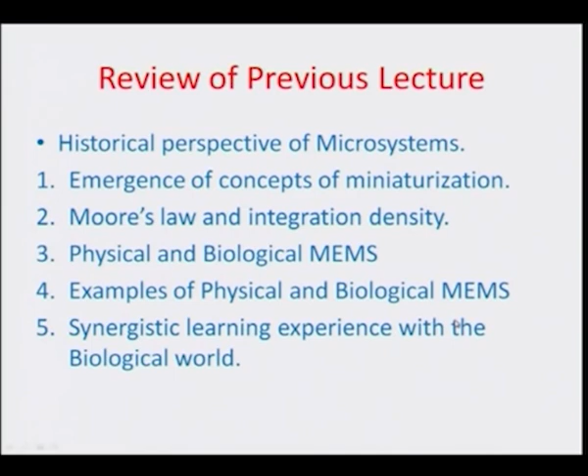We also talked at length about physical and biological MEMS, and discussed some very interesting examples of physical and biological MEMS systems. So, the take home message for this particular lecture was really that it is a synergistic learning experience with the biological world. There is a lot of inspirational material available from the biological world that can be translated to make microstructured systems, nanosystems. And so, a vast majority of fabrication processes are really bio inspired as well.

We will look into this in detail through a historical perspective of how machining or microstructuring evolved over time. So, let us get a historical perspective of some of these processes which are known as manufacturing processes.

So, we have already in our engineering lectures prior to this seen that a lot of parts can be manufactured by some of these basic processes like casting, forming, and various shaping processes. Therefore, all these processes making parts really require further finishing before they are ready to be used in an assembled form.

And these sort of high throughput processes are further required to be fine processed, so that whatever requirements of tolerances are dictated by engineering assemblies of such parts can be realized.

And so, this is really one of the reasons why initially advanced manufacturing processes were developed, so that tolerances up to the size of microns, or even nowadays increasingly to nanometers, can be easily provided by the advancement of the process itself.

Sometimes also in many engineering applications, interchangeability of a part is a major issue, which needs specific dimensional accuracy and surface finish. So, this again dictated the need for these advanced manufacturing processes.

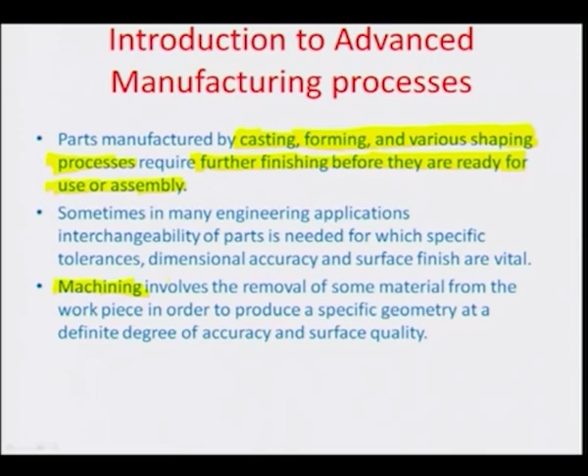So, let us look at one of these processes, machining, which involves the removal of some material from a workpiece in order to produce a specific geometry, and that too at a certain degree of accuracy and surface quality.

So, with machining into picture, one can really look into the history of machining, or where this concept of shaping objects started. One of the first examples in mankind of sort of machining comes from this most ancient Paleolithic stone tool industry, the Oldowan.

Further developments happened, and the invention of nets or bolas, where this big rock carved in a spherical manner would be tied up on a rope and thrown onto animals to make hunting possible, or even spears, tied at the end of a big stick, or bow and arrows developed. So, interestingly, machining dates as far back as this period.

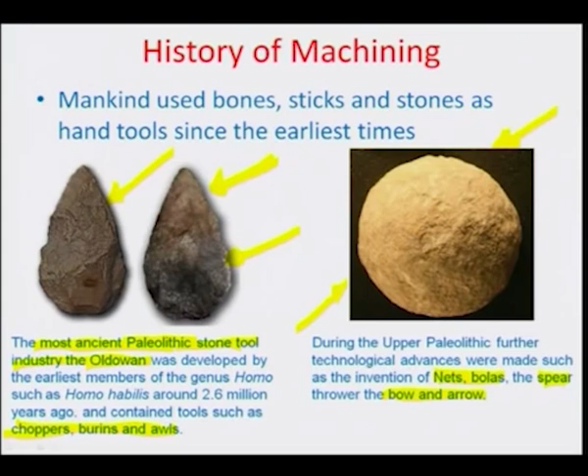And slowly things changed, and we went into the copper age, where still handheld tools had a lot of prominence in the copper as well as the bronze age, which was about 1,000,000 years back. So, some example problems are illustrated again here.

This was a ceremonial giant dirk found in France, belonging to the year 1500 to 1300 BC. This was some Bronze Age weaponry and ornaments which were developed by people who learned some of the basic manufacturing processes by this time, and still everything was really manual or handheld.

So, almost up to the 17th century, all the tools which men used for developing some of these fine objects were hand operated, and the methods were very, very elementary up till a little bit later.

Of course, humankind found out that the power of water or steam could be very easily used, and much later it was realized that electricity could be another very useful source of delivering energy, so that you could power and drive some of the tools for creating different shapes onto metals.

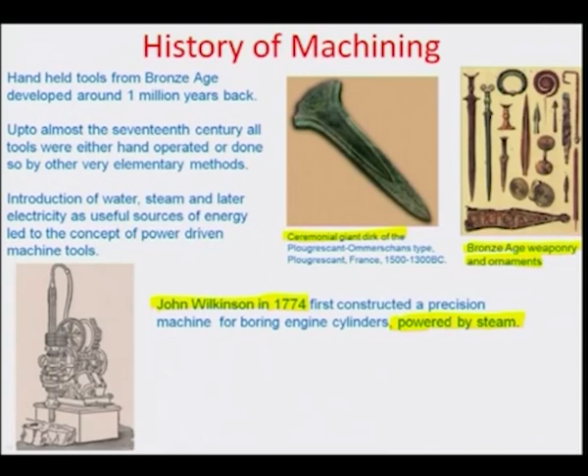This followed a lot of other illustrations later on. For example, 23 years later, Henry Maudslay developed this screw cutting lathe, as illustrated in this particular example. And then James Nasmyth invented the second basic machining tool for shaping and planing, also illustrated here.

And then the first universal milling machine was built by J.R. Brown in the year 1862, and these were all power tools, starting with John Wilkinson's first engine boring system, which used steam for providing the power.

After these basic machining tools were developed to have high throughput or highly productive processes, people realized that finishing was a very important aspect, so in the late 19th century the grinding machine was introduced for the first time, and as a more advanced form this process later changed to lapping. High quality surface finishes with very tight tolerances could be easily realized using a combination of grinding and lapping processes on the primary machining operations done by these powered systems.

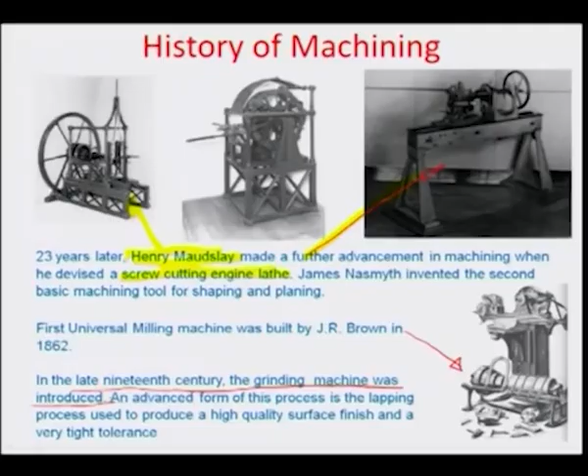If we look into a little more of history, in the later part of the 19th and 20th centuries, machine tools first became increasingly electrically powered, and they had many refinements. For example, people shifted from single cutters to multiple point cutters, and the milling tool was introduced for the first time based on this concept.

The whole machining paradigm, although it was powered, was still dependent on operators and human skill, who by their own judgment would look at parts and use his or her skills to completely provide the sequence of operations, and therefore the workpiece accuracy would typically depend on the operator.

As an increasing need for precision was felt rapidly in the industry, particularly because of complex systems like automotives which emerged on a commercial scale during this time, for the first time in 1953 numerical control systems were introduced, where a computer's power would be used with a numerical logic for obtaining good precision and repeatability of relative motion between a tool and a workpiece.

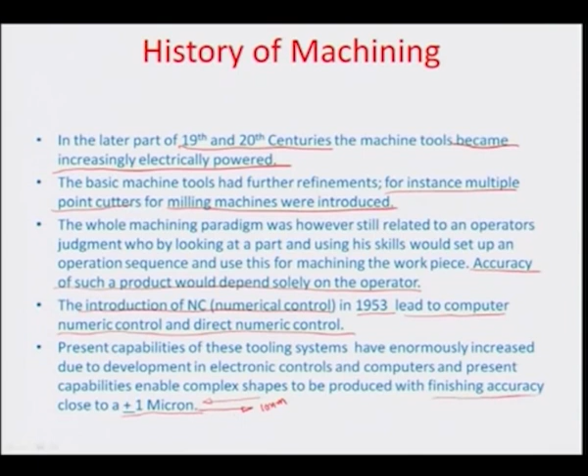Not only that, it has tremendous capabilities of producing complex shapes with finishing accuracies which can be as low as a micron level finish. So increasingly the power of the machining industry has grown over the various decades, and up till now this power can be really manipulated and maneuvered to even place a few atoms and molecules, and that is what the accuracy level has slowly gone into.

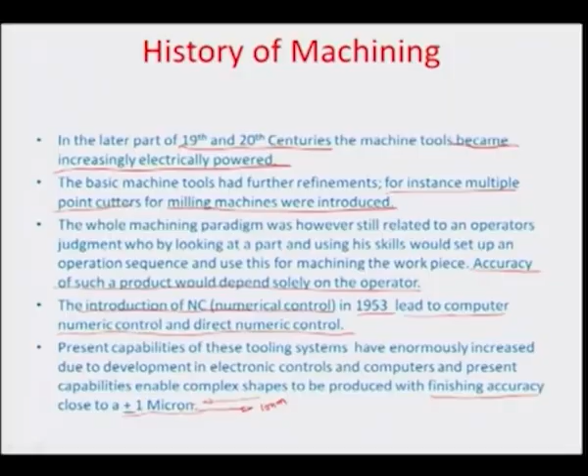In modern machining practices, one important aspect is to be able to remove material which is harder, stronger and tougher, and more difficult to cut, and that is one of the goals of some of these modern machining practices. It should be independent of material properties of the workpiece, and as such, increasingly from this so-called conventional domain of metal to metal cutting, the focus has changed.

Increasingly the focus has shifted into some of these non-conventional machining practices, which have become very handy as an alternative, particularly if you have to realize complex shapes with a certain amount of surface integrity, and most importantly, miniaturization or micron size requirements of the components. So in this course we would be more focused on this non-conventional machining domain, and the way it would be used for achieving some of these targets, such as machining complex shapes or very, very small teeny tiny components, and how that can be manufactured.

We would probably be going through some material based on that.

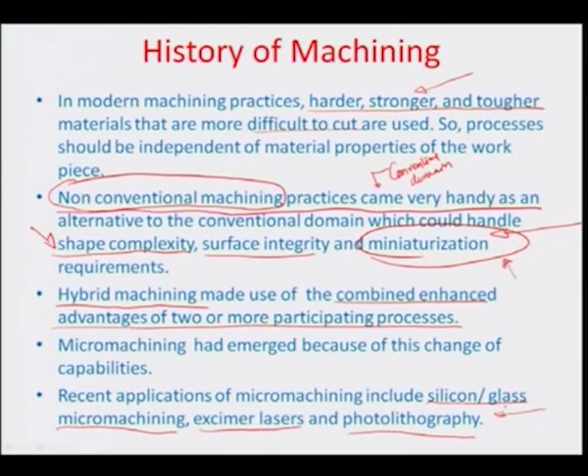Because of all these domains which are now increasingly available in machining science, micro machining has emerged into a domain where very small, up to about 1 micron feature sizes can be realized very easily, combining some of these technologies as hybrid machining technologies. Recent applications of micro machining could include silicon and glass micro machining, excimer laser based machining, photolithography, and these are some of the most modern processes of non-conventional machining used in this particular domain.

Machining has increasingly also come up from precision grinders, where an accuracy of about plus minus 1 micron can be measured using some non-contact mediated measurement processes like interferometry or laser based instruments.

And the future trends in micro machining really include the power of beams of either photons or particles, and processes like electron beam lithography or focused ion beam, increasingly being used to realize or micro manipulate materials even down to the atomic level in a very precise manner.

These, combined with a few other processes, are also classified into the area of nano machining as a very recent trend, and these processes are capable of manipulation at the atomic and molecular level.

The nano machining concept was first introduced by Taniguchi, and it covered miniaturization of components and tolerances in the range of submicron level, and also to the level of hundreds of nanometers or even as low as 0.1 nanometers in the various domains proposed by Taniguchi in his model for nano machining.

Let us look at some of the machining accuracies with respect to the number of years, as illustrated in figure 1.1. As you can see, these different domains of machining, like turning and milling machines, grinding, CNC machining centers,

lapping, honing, jig boring and grinding, so on and so forth - these are the different equipments and machine tool classes which are grouped together in order of how much machining accuracy they can produce. If you look at the way that this machining has evolved from as far back as 1940 to the late 2000s, you can see that the machining accuracy has really changed quite a bit.

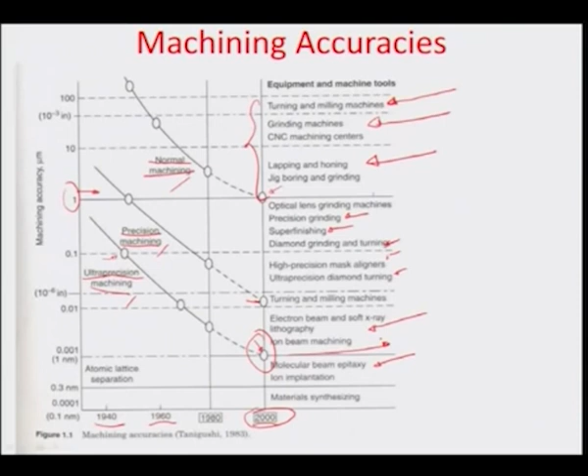So, such is the power of machining technology and its emergence over the number of years.

Let us now look at a broad classification of all the machining or material removal processes. I would like to classify the processes as a traditional domain and then the non-traditional or non-conventional domain. Of course, this would be our area of interest for this course, although a brief mention would be made of the traditional domain processes.

In the traditional machining area, if you look at the class and subclasses of these machining processes, you have a category of cutting processes which can be classed as turning, boring, drilling. These are all cutting processes that generate circular shapes. Other shapes can also be generated by other cutting processes or metal cutting mechanisms like milling, planing, shaping, broaching, sawing, filing, gear forming, gear generating, so on and so forth.

Traditional machining has one domain involving metal to metal cutting, and another domain used for finish machining operations on cut pieces, which is mechanical abrasion based. This can be based on bonded abrasives, as found in grinding or honing, or coated abrasives technology, or loose abrasives found in polishing or buffing, where the slurry contains the abrasive and the tool rubs the slurry against the workpiece surface. Needless to say, this is a high throughput, low accuracy process, while mechanical abrasion is a relatively lower yield but high accuracy process within the traditional machining domain.

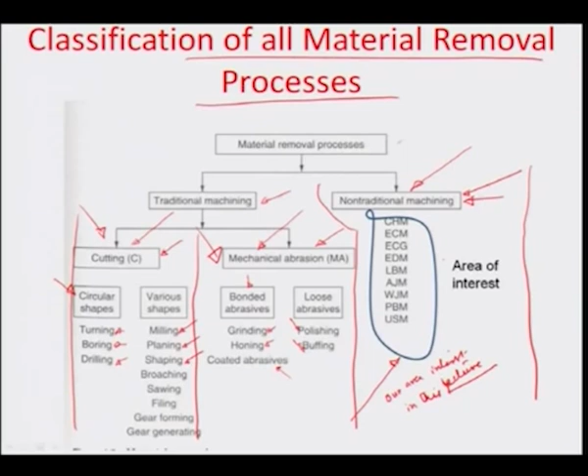Therefore, these machining techniques called non-traditional machining come into picture, and they typically include chemical machining, electrochemical machining, electrochemical grinding, electrodischarge machining, laser beam machining, abrasive jet machining, water jet machining, plasma beam machining, and ultrasonic machining. These are some illustrations of the machining domain where very small surface finishes or even micro feature sizes can increasingly be found.

And then there is a whole domain of silicon machining, which is also borrowed from the microelectronic processing industry, which we would be looking at in great detail.

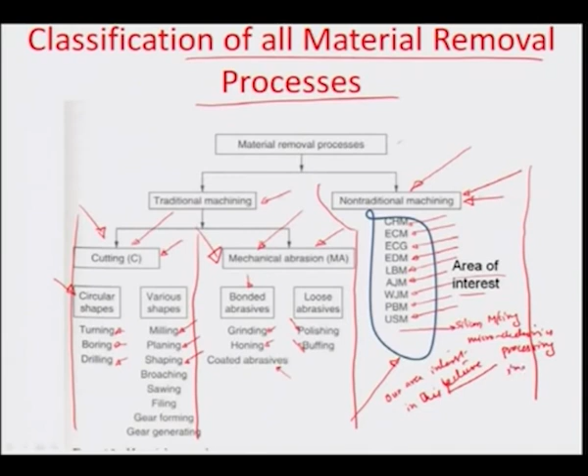Let us look briefly into the conventional domain of machining before starting. Typically in the conventional domain, there is a tool used for penetrating work material to remove a certain amount of material up to a depth, and the depth that the tool goes into the material is known as the depth of cut. There is a relative motion between the tool and the workpiece, and different geometries can be realized based on this relative motion.

For example, look at turning, the way it produces cylindrical parts. You have a single point cutting tool and a mass which needs to be machined, rotated at a certain RPM, and the tool scribes off the material, increasingly going deeper into it, so that circular symmetry of cut can be generated and a cylindrical piece produced. Shaping and milling, of course, generate flat surfaces.

Then there are drilling processes where you can produce holes of different diameters, where again the relative motion between the tool, which rotates, and the workpiece, which is fed linearly, determines how the shape of machining is going to be on the workpiece.

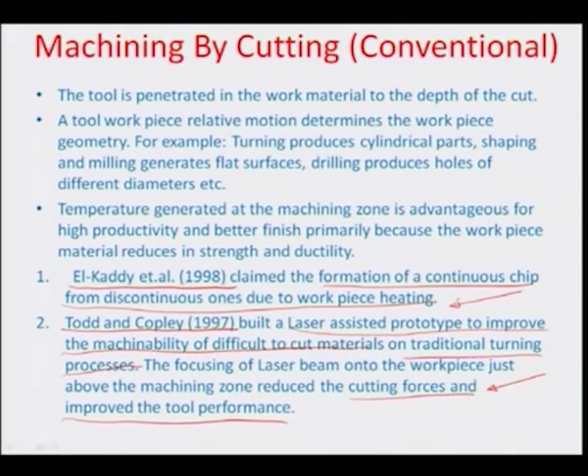So, some examples of playing around with the temperature of the material in order to get better finishes or more material removal have already been demonstrated by various people using conventional machining domain.

If you categorize the different metal cutting processes, they can be classified into forming processes or generation processes, and I would like to distinguish between the two. A forming process is typically when a cutting tool possesses the finished contour of the workpiece.

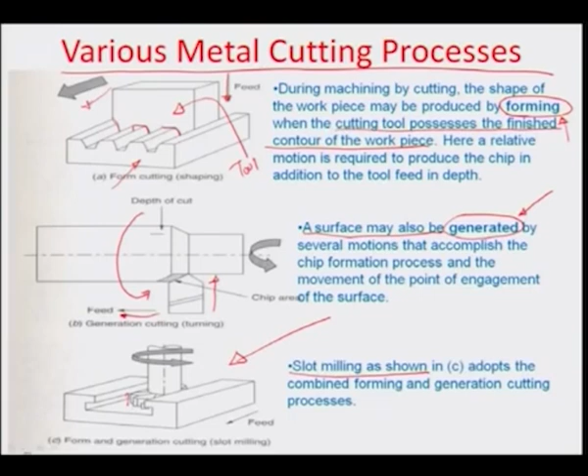There can be a combination of both forming and generation processes, as illustrated in this slot milling example, where forming can be thought of as provided by the thickness of the cutter, and generation can be thought of as the relative motion between tool and workpiece doing the machining operation. So, these are all the metal cutting processes, and the other process I was referring to is machining by abrasion.

In abrasion machining, the machining allowance is removed by a multitude of hard angular abrasive particles or grains, which we also know as grits, which may or may not be bonded to form a tool of definite geometry.

In contrast to metal cutting processes, during abrasive machining the individual cutting edges are randomly oriented, and the depth of engagement is small and not equal for all the abrasive grains. There is an averaging effect of the cutting depth, which results in a sort of surface finish.

This is compared to high yield processes, like some of these metal cutting processes - forming or generation processes, etc. Abrasion is really a finish machining operation, and not all the abrasive grains are simultaneously able to remove material. They come in contact one by one and remove material by brittle fracture, so the averaging effect becomes more prominent, because the chips removed are very minute and mostly invisible, since the temperature of operation is so high that they get oxidized, and you can see a flame come out from this rubbing action of the abrasive.

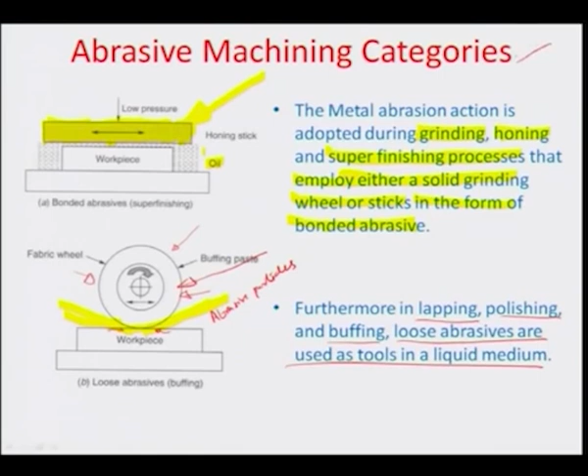So that is how abrasive machining can be categorized into various different domains.

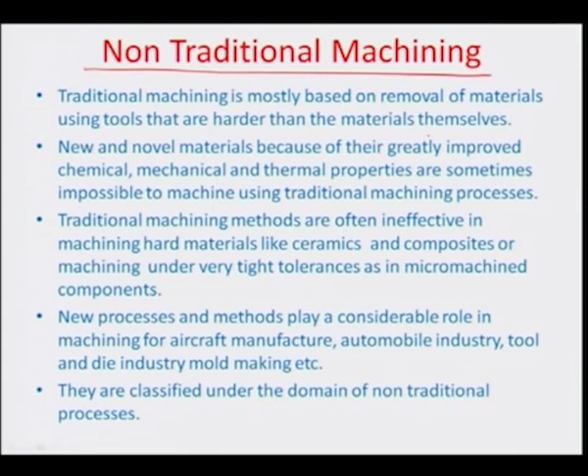Now let us get into the domain of non-traditional machining processes, as we have illustrated so far many times. Traditional machining, of course, is mostly based on removal of material using tools that are harder than the materials themselves. Increasingly, the need for non-traditional machining is felt because of novel materials or alloys or high strength composites being developed by material science, so that these techniques can be commensurate with such novel materials, which are increasingly finding engineering applications in industries.

So what are these non-traditional processes, or what is the domain of non-traditional machining? Let us have a closer look by going into this illustration. Here I have tried to classify some of these non-traditional or advanced manufacturing processes into different domains, and there are three principal domains we can classify these non-traditional machining processes into.

There is a mechanical machining domain where you can again use mechanical removal of material as a means of doing machining. Of course, in this case, the material removal will not be in a bulk state as in turning or grinding processes, but in a very superfine state by use of abrasive materials in a very interesting manner. There are also thermal ways and means of removing material.

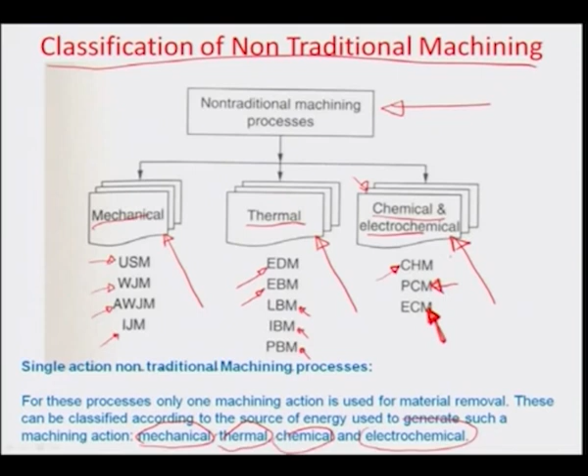By the way, this classification is really based on how you are applying the energy. So you can have the machining action using mechanical energy, thermal energy, or chemical or electrochemical energy, and they form the classification basis of these different material removal processes in the non-traditional domain. Let us look at these machining processes one by one.

So the first mechanical machining process which comes to our mind is ultrasonic machining, or as a matter of fact, water jet machining, which are typical examples of single action mechanical non-traditional machining processes.

If you look at how this happens schematically, there is a mixture of abrasive grains made up of a liquid medium into which these grains are immersed, and these grains are all individually capable of moving freely. This grain-containing slurry is pressed onto a workpiece by means of a tool which vibrates at ultrasonic frequency. So essentially, this tool head vibrates, let's say in the positive z direction, at ultrasonic frequency, and is able to hit the abrasive grain onto the workpiece surface and thus remove material in the brittle fracture mode.

Super finishing processes sometimes use this USM driven material removal mechanism, where the feed, depth of cut, or even the tool frequency can be adjusted so that different levels of finish can be obtained on the surface.

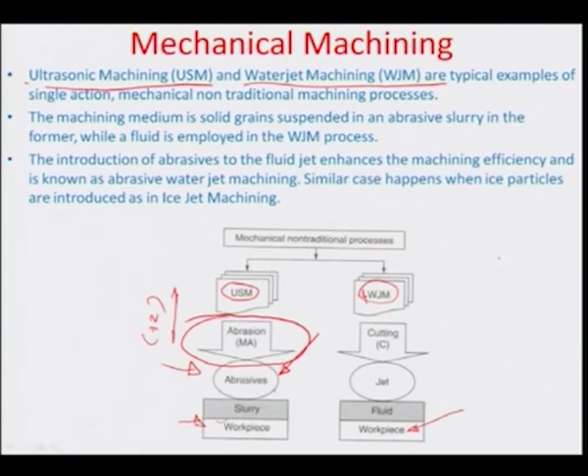The machining medium in most of these cases is solid grains suspended in cutting fluids, and you can actually replace the abrasive grain with ice particles, which is subsequently called ice jet machining. All these are mechanical non-traditional processes, because the action applied here is really brittle fracture based mechanics of material removal, and therefore mechanical.

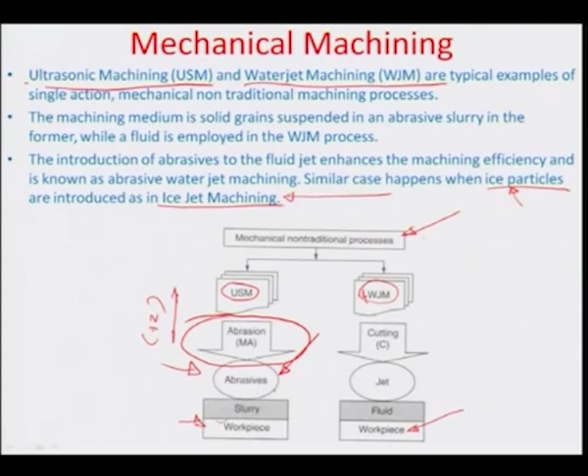We will look into the details of this process, particularly USM and abrasive jet machining, a little bit later. And let's come to the second modality of material removal, which is also known as thermal machining operation.

Here really the modality is thermal, in the sense that you are trying to apply heat energy so that it can cause melting or vaporization of the workpiece material, thereby removing the material as a liquid or vapor state.

There are many secondary phenomena which occur when thermal machining is being considered, for example micro cracking, formation of heat affected zones, striations or banding phenomena, which can come during thermal machining processes if they are not very well controlled.

So an important modeling aspect of such processes comes into picture, which we will look into in great detail as we go over some of these processes.

The source of heat could either be that of an electric discharge, as you can see here in EDM. There is a plasma or discharge created between the workpiece and the electrode, and the dielectric material in between acts as an insulator, where the plasma can be created in specific columns.

Whenever this plasma gets created, the electron pressure is able to create a local temperature enhancement, taking the workpiece material wherever the plasma strikes to its melting point, and whatever melt is formed is removed by the circulating dielectric material. This is one form of machining called electrodischarge machining.

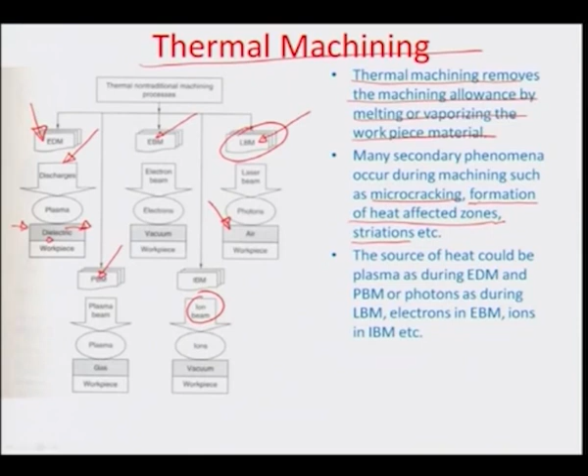A third category of processes is chemical and electrochemical machining. In electrochemical machining, you have an electrode and a workpiece as another electrode, with electrolyte flowing between them. There is always ion transport happening within the electrolyte, where material is removed from the workpiece, and the idea is that it should not get deposited onto the electrode but should precipitate as soon as it is removed from the workpiece.

The electrolyte constitution is very critical, so that it is able not only to create ion movement from the workpiece but also to precipitate the material and move it if we circulate the electrolyte around. That is what is meant by electrochemical machining, and it is governed by Faraday's principles—you can calculate and model the electrochemical machining rate based on these basic physics principles.

The other process is chemical or photochemical machining. Chemical machining falls within the domain of etching, which is really nothing but engraving of a metal structure, or engraving a certain area of a metal or other substrate by etching it selectively with a chemical.

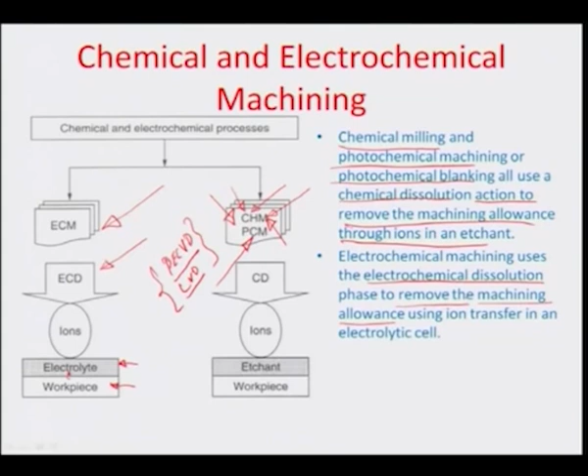Electrochemical machining uses electrochemical dissolution by the passage of electrons and ions within the electrolyte, and the machining allowance can be removed using an ion transfer mechanism in an electrolytic cell. So, in a nutshell, that is a brief description of what will be in the course content.

On one hand, we are going to learn about fabricating microsystems from the angle of micromanufacturing, which would mostly include silicon-based processes, as well as processes applicable to polymeric systems or glasses, from a standpoint of microsystems fabrication.

The other end of the course would delve into advanced machining technologies—thermal, mechanical, and chemical or electrochemical forms of machining. Finally, we would like to integrate the two, so that we can use these advanced or non-traditional machining processes for manufacturing microsystems.

This section of the course will focus on advanced research articles about how MEMS can be created using non-conventional machining technologies. We will also practically demonstrate some microsystem fabrication protocols and processes where non-traditional machining is actually used in practice to create a real microsystem. So that, in a nutshell, is what this course is intended to be.